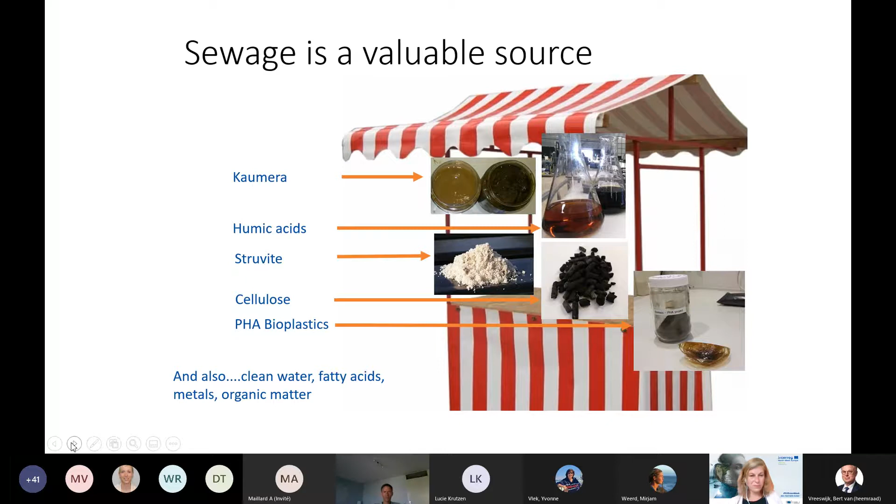The interesting question then is, why is less than 1% at this moment of these raw materials from sewage reused, or actually I must say upcycled? Our theory is that the potential of this big source of valuable materials is still unknown by the market. It's also a technical challenge to extract raw materials. It's quite complex to build installations. You will hear it soon from my colleagues and from our partners, to extract those raw materials in a way that it can be used by the markets.

Thirdly, sewage has an image of dirty and unsafe by the people who are not familiar with it. And of course that makes sense, because years and years ago we created sewage treatment plants to clean our water and to purify it as soon as possible. And what's left of it, the sludge, well it still has an image that it's not safe for any other purposes than to burn it. And last, the legal framework to commercialize raw materials is quite complex.

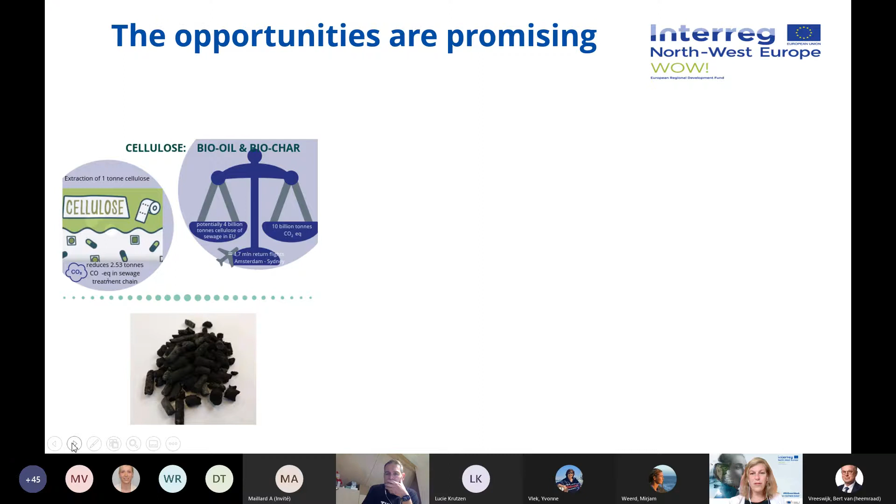The opportunities are very promising. If you look at the case of cellulose, you can make bio-oil and biochar from it—this is also the topic of this webinar. If you extract cellulose from sewage, it will reduce more than 2.53 tons of CO2 equivalents in the sewage treatment chain. This is equal to 4.7 million return flights from Amsterdam to Sydney, to make a comparison that sounds a bit more familiar.

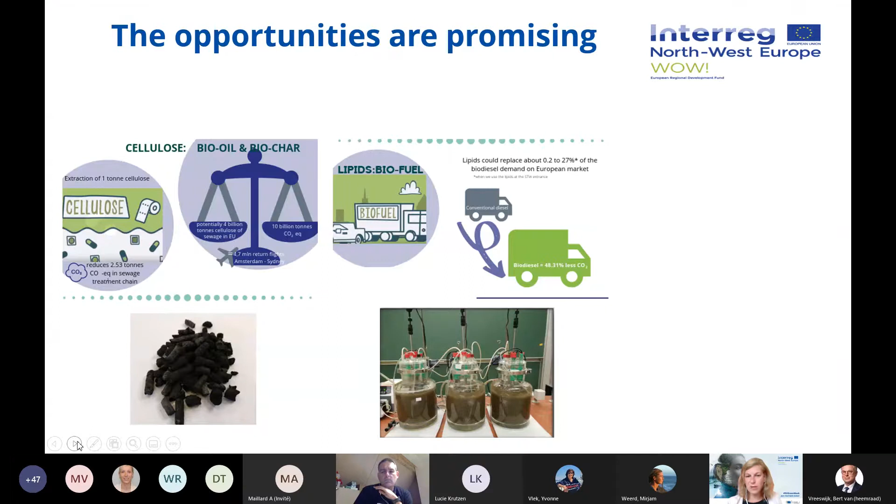If you look at lipids, you can make biofuel from it, and lipids can also be extracted from sewage. Lipids could replace around 0.2 to 27% of the biodiesel demand on European markets, depending on where in the sewage treatment plants you extract it. If you extract it from the beginning of the plants, 27% is the potential.

And last, PHA bioplastics have a potential production of 1.03 million tons of PHA per year from sewage treatment plants in Europe. That's substantial.

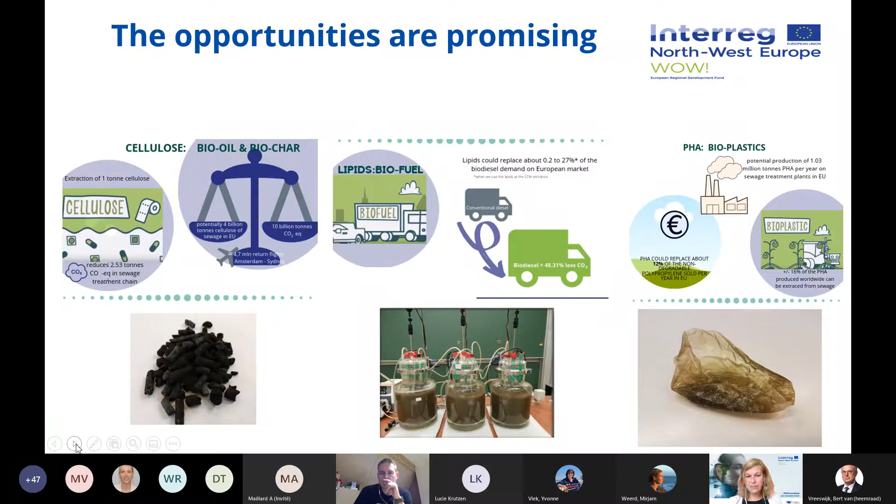So in the WOW project, our goal is to show that it's technically possible to recover raw materials from sewage. We would also like to create a European framework for the steps that need to be followed from waste to raw material—that's the end of waste process. And we would like to make market parties become acquainted with the potential for materials from sewage.

We hope that when the WOW project ends, we will have created 5 value chains for bioproducts from sewage, that we have 3 pilots—well, those are already there, we'll tell you more about that soon—that we have a supporting tool to help sewage treatment plant operators in their choices toward a circular approach, that's the decision support tool we've created, and finally that we create a European legal roadmap with one clear framework showing how you come from raw materials to valuable products.

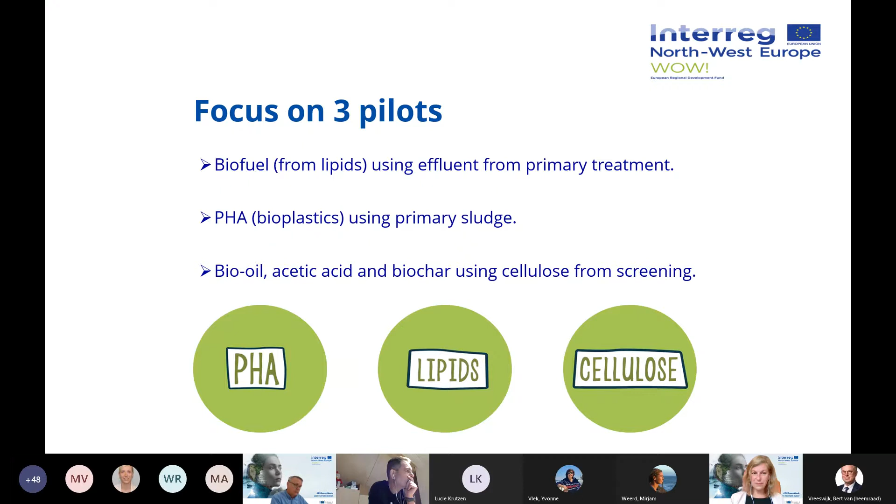In WOW, the whole project is built around 3 pilots. One pilot is about biofuel from lipids using the effluent from primary treatment. We have a pilot on extraction of PHA bioplastic using primary sludge. And we have the cellulose pilot, in which we extract bio-oil, acetic acid, and biochar using cellulose from screening. So far, we have those 3 pilots more or less running.

We created an overview of the current value chain and the market potential in Northwest Europe, and we made 5 legal action plans for 5 Northwest European countries, showing the challenges in the current situation to create a valuable source from raw materials from sewage.

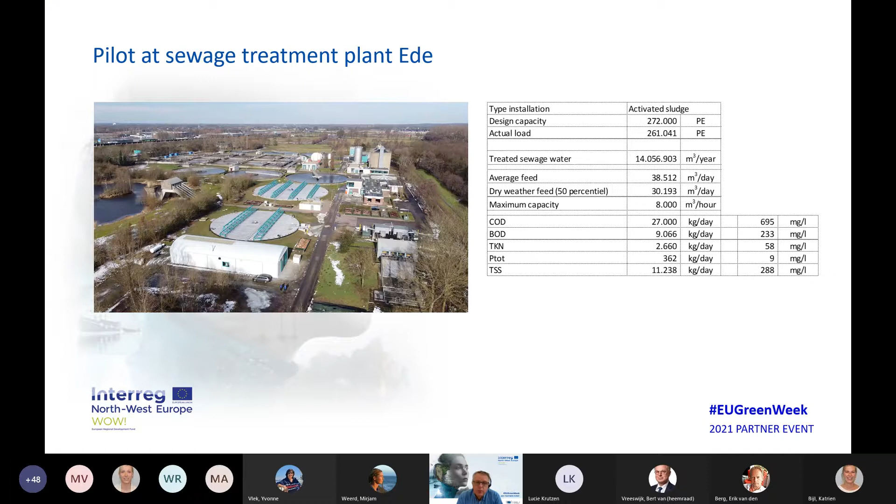Capacity of the treatment plant under normal dry weather conditions is 30,000 cubic meters a day, and the average feed is about 38,000 cubic meters per day. We don't treat the full flow of the installation.

We made a mass balance over the fine screens at their maximum capacity. So it doesn't mean the pilot will always run at this, but the capacity of the installation is based on an average flow of about 800 cubic meters per hour, having total suspended solids of 232 milligrams per liter. This is different from the average number you typically find, but prior to doing the design, we took samples of the influent to determine an average, and came up with this number. So that's the basics.

The efficiency we aim for—and there's always a discussion about the efficiency of rotating belt fine screens—we measured it on black ribbon paper filter, and we expect to have an efficiency on dry solids of about 54%. Taking into consideration that the discharge of screened material has 6% dry solids, we will get about 1,800 kilograms of dry solids a day at maximum capacity.

Of course, the solids that don't leave the installation with the screened material go to the filtrate, and that's a little bit less than 50% of the solids going through.

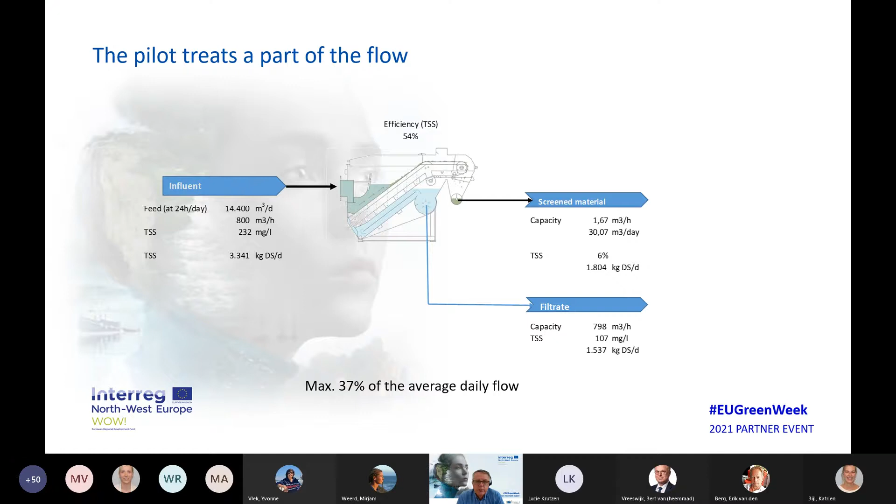On average, we will run somewhat between 400 and 600 cubic meters per hour. The installation is set up with two rotating belt fine screens, with a feed pump installed after the coarse screens, which is 6 millimeter coarse screening, and then there is a flow measurement to measure the capacity split over two rotating belt fine screens that operate in a master-slave setup.

So basically one machine is up and running, and when we get more solids than it can handle, the second one comes up as well, and they alternate operation. The installation runs based on the level in the machines. We set a certain level, and based on this level, the belt speed is controlled. When we have maximum level and maximum belt speed for some time, the second machine will switch on.

During this test, we will also test something new that is not installed on any rotating belt fine screen yet. So there's a novelty in the machine, and that novelty is that we have installed a scraper installation.

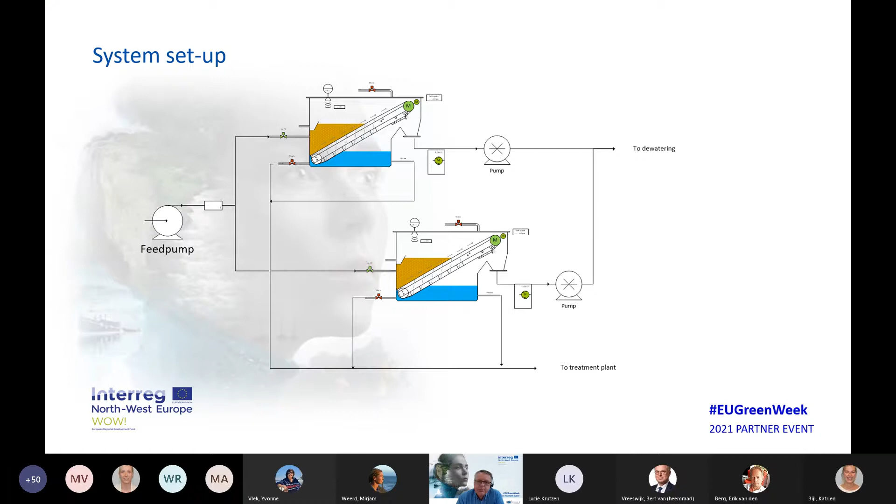A setup for the building has been made, you see some pictures of it. Basically, the building is set up in two parts: a wet part and a dry part. On the right side is the wet part, where the two rotating belt fine screens are installed, and water comes from there to the dewatering machine that is part of the Pulse Heat installation.

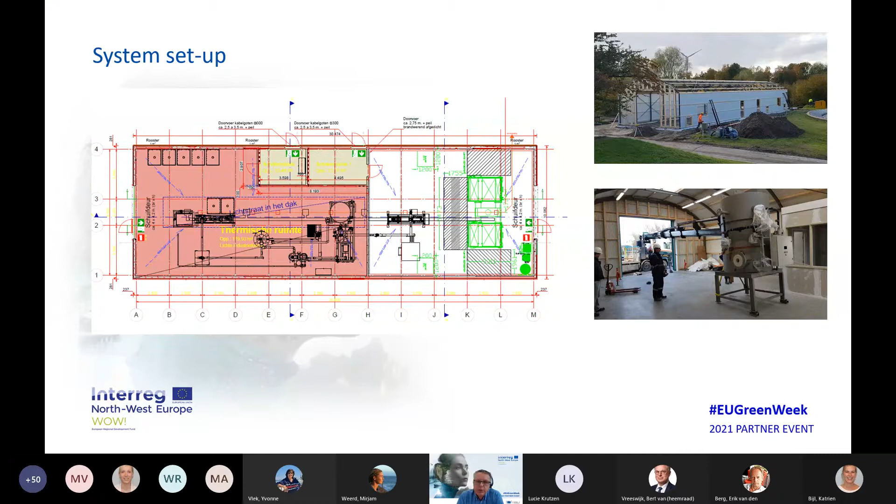A quick tour. We don't have the online tour, but some pictures so you can recognize it. Here we have the feed pump pumping water after the coarse screen, going into the pressurized side, coming up through this pipe, where we measure the flow before the split.

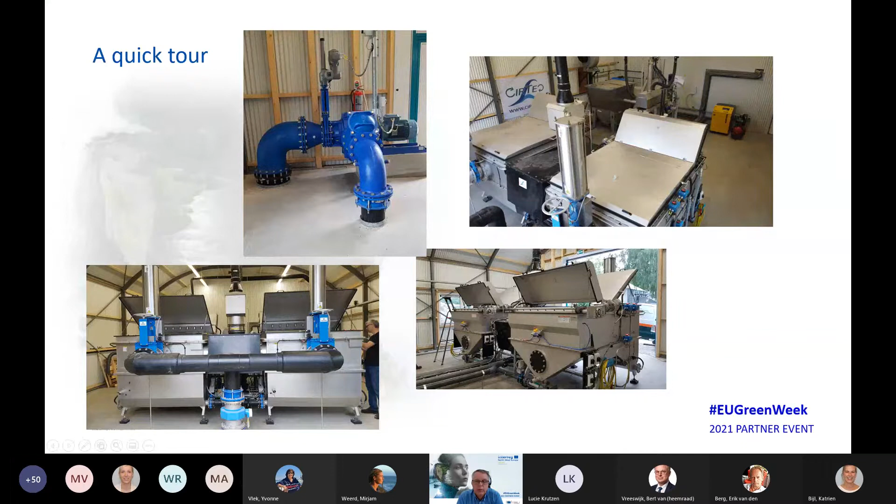It goes over the two rotating belt fine screens. In the middle of these machines there's a collector where we collect the filtrate, the overflow, and the bottom flush for discharge. This is the exit side of the machines, where the pumps go into the dewatering installation, which is controlled fully automatically based on settings, so we can monitor it from a distance and see what is happening.

We measure basically all the controls and all the frequencies of the equipment, meaning we can make a pretty good mass balance and see the operations.

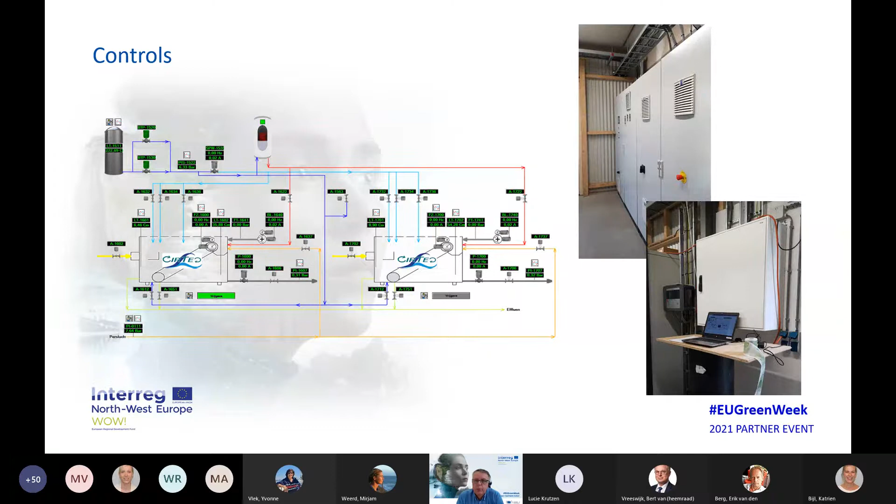Talking about operation, this is how it looks when the machine has feed water, and then the material on the discharge side as well.

So this is, in short, my presentation, and I would like to give the floor to Mark. Sorry for the disturbance sometimes, but we have some issues here around us, so sorry for that.

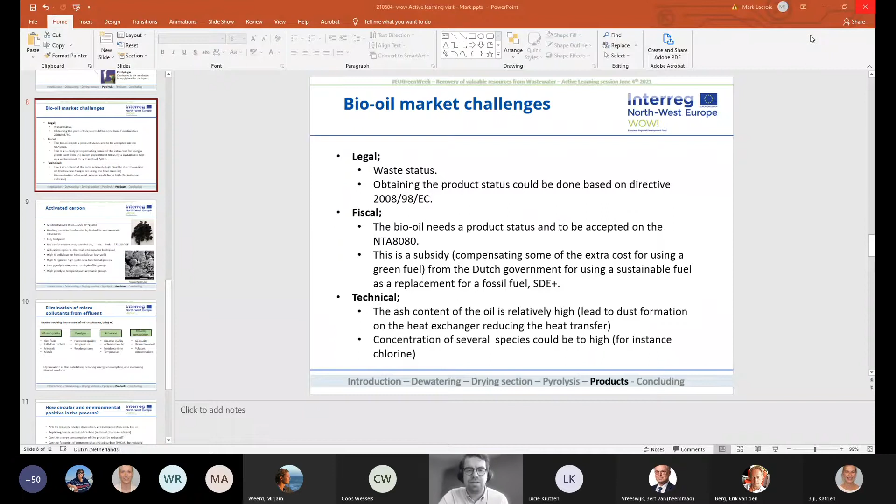I'll also be giving an update in this presentation about the process equipment supplied by Pulse Heat, and I'll discuss the pyrolysis products, and give some regard to the issues and market opportunities of these products.

In my next slide, yes, here it is. To make the explanation of the rest of my presentation a bit easier, I'll give a short introduction of the process.

As Coos already discussed, the sewage is partially pumped to the cellulose screens, which are part of the wet part of the installation. There the cellulose is recovered, and then it is dewatered. The dewatering will be shown in the next slide, and after the material is dewatered, it will be dried and made into pellets suitable for use in the pyrolysis section. The pyrolysis section will yield bio-based products that are very interesting for this project.

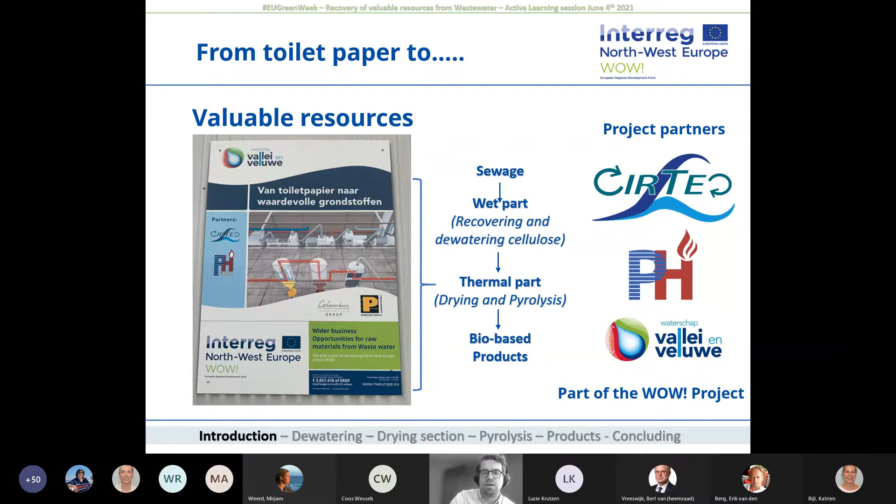This buffer is used to physically separate both parts of the installation, so if a process complication happens in the wet part, the thermal part doesn't directly have to get into trouble because of that. The filtrate coming from this press is returned to the wastewater treatment plant.

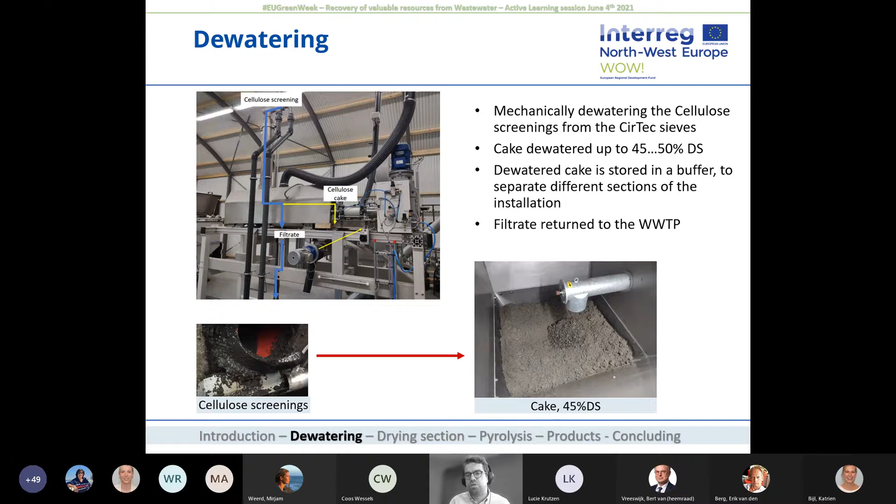The thermal energy necessary for these dryers comes from the pyrolysis pyrogas co-combustor. In that combustor we basically have two separate burners: one using propane as a source, which is our main burner.

When the pyrolysis section, which I'll discuss later, is started, it produces a flue gas, a syngas, which is also combusted in that co-combustor. That's also why it's quite large, because due to environmental regulations you need a certain temperature there of at least 850 degrees, and also a certain residence time of 2 seconds.

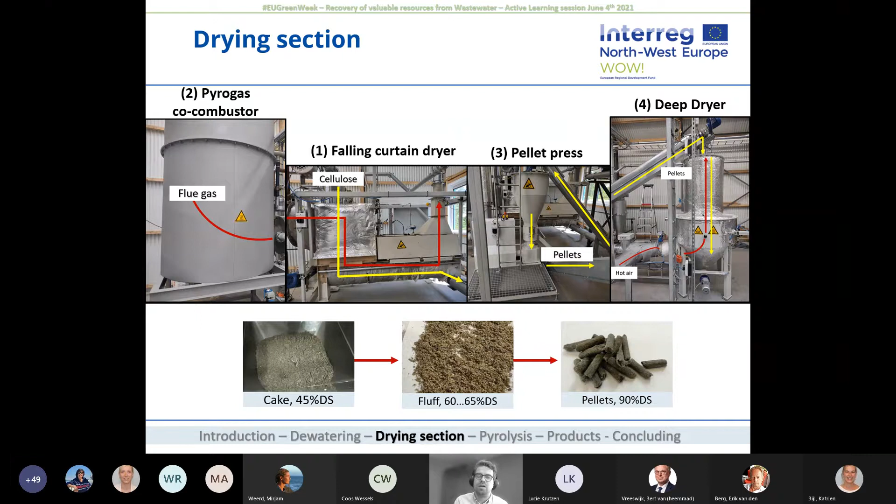Both gas streams, from the deep dryer and the falling curtain dryer, go through a wet cyclone before being emitted into the air.

But what is pyrolysis? Basically, if you have an organic material and heat it in an atmosphere with low oxygen content, the material will start to degrade and a volatile fraction will emit from it.

This volatile fraction can be condensed in a few stages. One leads to a bio oil, another leads to the acid, and another leads to the syngas I discussed.

The reactor we're using is a flash pyrolysis reactor, with a short residence time for the gas phase. Whether you call it an advantage or disadvantage, it yields a higher bio oil yield compared to the bottom product, which is biochar.

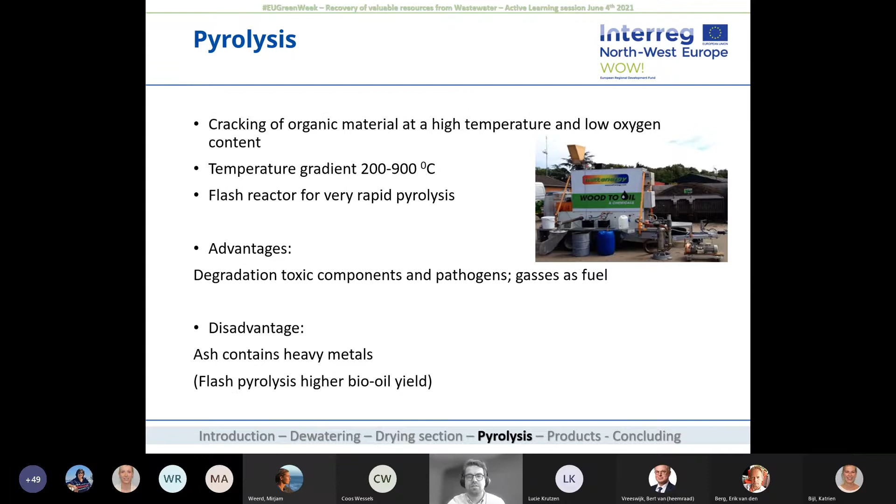Dr. King asked which machine is used for dewatering. It's our own design, a screw press. You compress the cellulose, and by compressing it, there's less room for the water between the fibers, and the water is transported through a sieve.

Another question: is this pyro machine also usable for other materials than the pellets? Yeah, you could also use it for other organic material. We've tested it with wood chips, and we could also use it with corn chips or something else.

This is an image of the pyrolysis section. It consists of four separate units. So you have the reactor.

The pellets are transported there from our pellet buffer, and we want to make sure there's a stable bed in the reactor so all the pellets get approximately the same residence time, which is important to keep product quality stable. We're using a flue gas burner, a propane burner, generating flue gas of around 900 degrees, as a thermal heat source for our reactor, because the pyrolysis reaction requires energy.

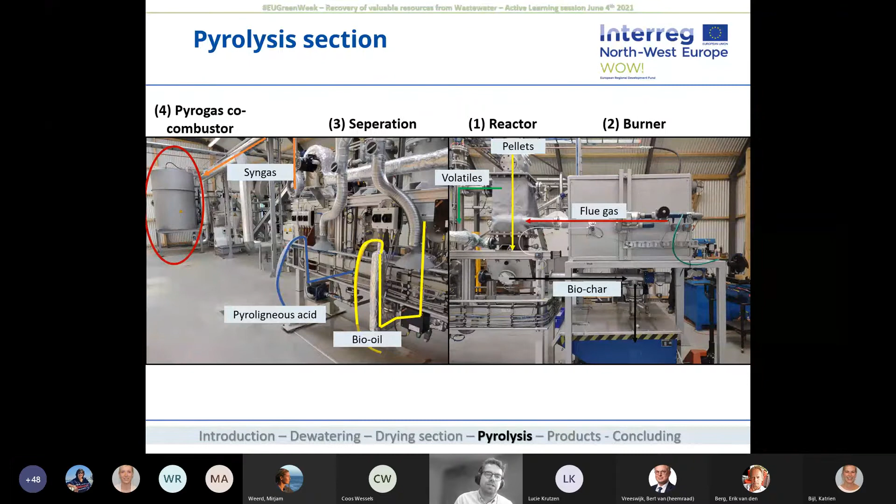Okay, here are the images of our pellets and the different components we are creating from them.

So we have this char that leaves the reactor at the bottom, and after activation, it can be used for absorption of micropollutants, for instance, from effluent.

We have a bio oil. This is a viscous oil with a high energy density, and ideally it could be transported out of the location site and used on a different location for combustion, and then to generate steam there. By generating steam over there, you're able to reduce, for instance, natural gas consumption.

Then we have a pyroligneous acid. Ideally, it would be used on the wastewater treatment plant, since it could enhance the denitrification, and it's useful for the biological phosphorus removal.

And then this is also the pyrolysis gas or the syngas, as I described it before. You can also see it gives a really nice flame, so this is also suitable for supplying heat for our dryers.

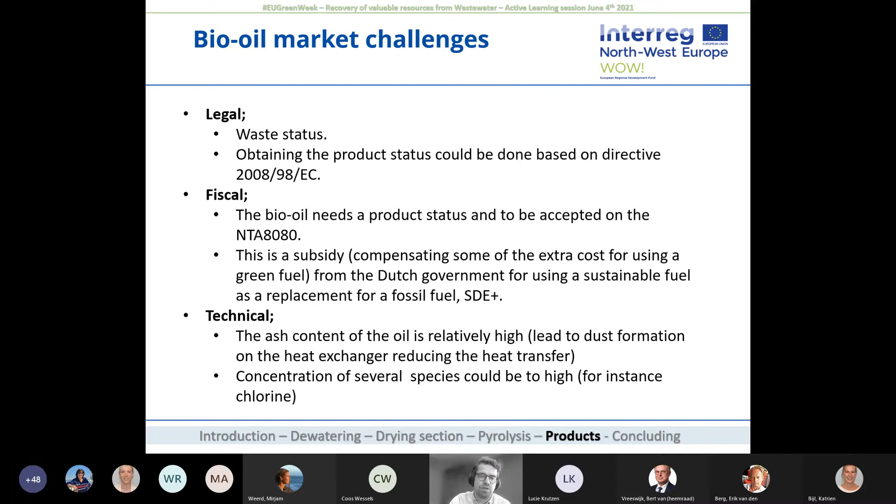The carbon, so the biochar that we're producing at the reactor, you can activate it using several methods. For instance, thermal - then you'll be using steam or carbon dioxide as a means to activate it. With activation, you're basically increasing the microstructure of the carbon, so you're increasing the surface area, and this surface area is used as a binding site for different micropollutants.

Based on the size of your pores and the total surface area, you can bind different chemicals. And then there's also chemical means of activation - with this chemical means, you usually get a bit higher surface area than the thermal one.

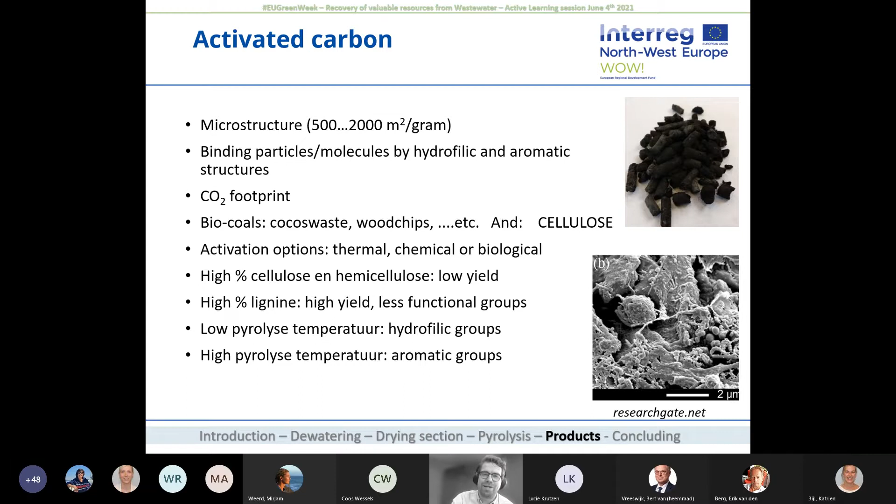You can also use different feedstocks, and then there's also the composition of your feedstock. So, for instance, with cellulose, you have high cellulose and hemicellulose content, which also yield different components of different fractions in your biochar. This would lead to, for instance, a bit higher bio oil yield and a bit lower char yield. And the pyrolysis temperature also affects what kind of groups you get, and more of that. But this does make it a bit complicated - and this is also what I'm going to show you in my next slide.

So if you want to remove micropollutants from effluent, there are several variables that can affect the absorption or the total removal. You have this influent quality, for instance, the amount of cellulose that's in the material, or the amount of minerals, and also whether you have a first flush. It will also affect your feedstock for the next section. And in the pyrolysis section, you can have different temperature and different residence time, which lead to a different surface area. After that, you can get different variables for your activation.

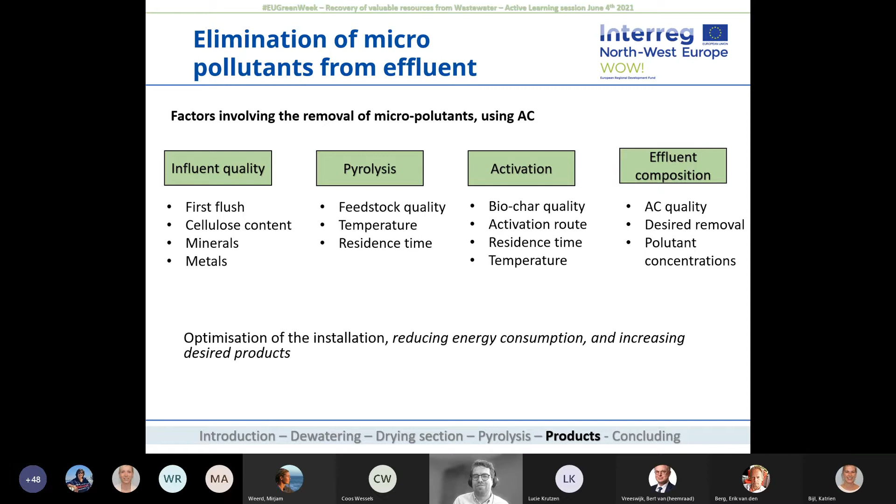And then there's also the effluent you want to treat. The effluent has different pollution concentrations, and you have a desired removal that you want to keep. So basically, there's a lot of optimization to be done.

And then also an obvious interesting question - how circular and environmentally positive is this whole thing?

From a production perspective, a wastewater treatment plant is very interesting because you have a continuous source of feedstock for your process. And by using this feedstock, you're also reducing the amount of pollution in the wastewater treatment plant. So you're basically reducing your sludge deposition and making useful products out of it. It's also nice to use your own products on your own wastewater treatment plant.

So you could use your fossil-based active carbon and replace it with your own biochar. And this process can most probably also be made more energy friendly by using different or less energy for drying. This drying is usually one of the largest energy consumers.

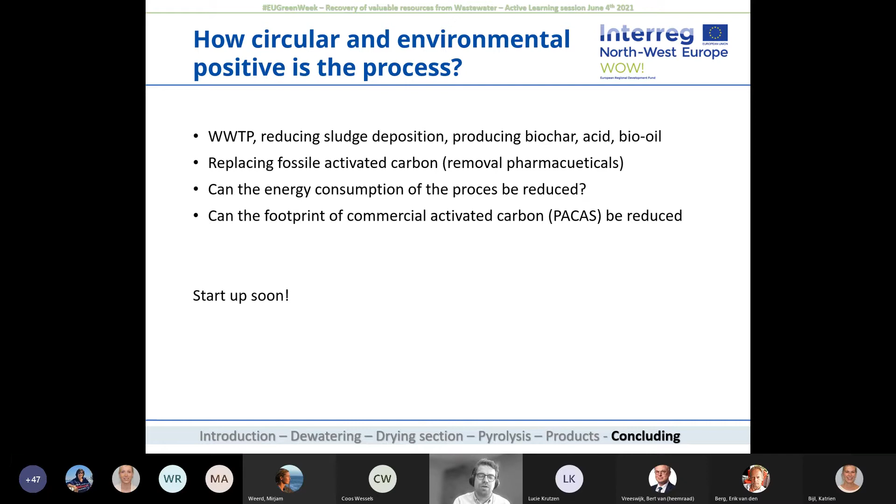What would also be very interesting is how the footprint of our carbon compares to commercial activated carbon. We're about to make our own bio-based products very soon, hopefully in the next few weeks. So it's going to be very interesting.

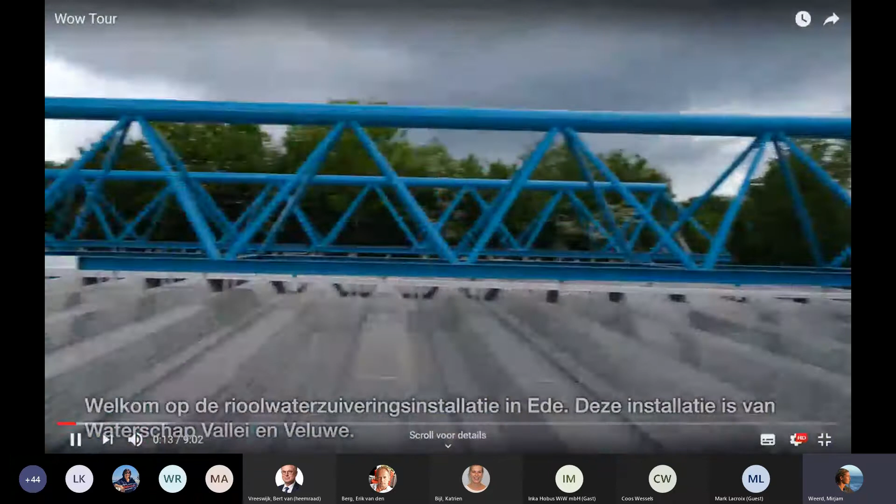Welcome to the sewage treatment plant of the community of Ede. This plant is part of the Dutch Water Authority Waterschap Vallei en Veluwe. On this plant, we run innovative pilots from the WOW project together with the partners. Let me introduce our partners, Marit and Mark. Mark is from Pulse Heat, Marit is from Cirtec.

I wanted to show you another part, very important for our pilot, because I take you in this direction. Here we have the coarse screen, and this is important for our pilot. All the wastewater that comes into the sewage plant is first sieved to remove all the bigger parts. So they are removed, then the water goes through the whole plant. So I go inside, see you later? Yeah, see you later.

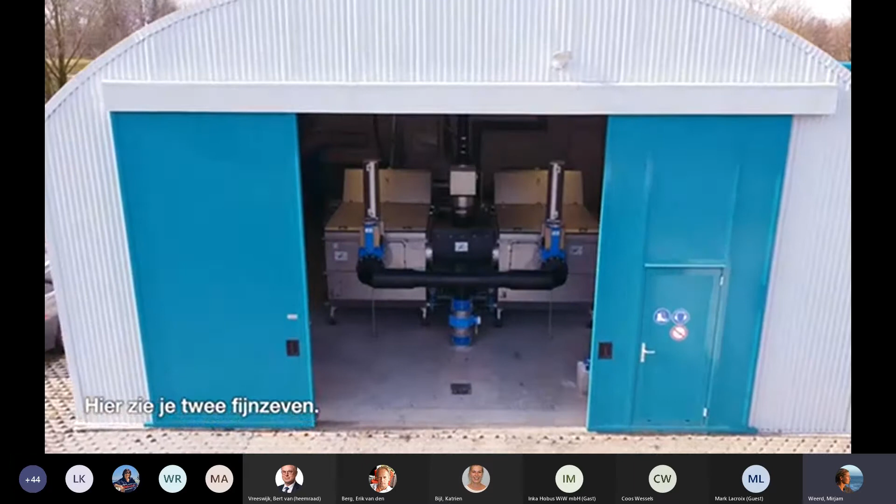So now we are in the pilot itself. Here you have the first step, that's the pumping step. A part of the incoming sewage is pumped into the fine sieve installation and the rest goes to the whole treatment plant. This is a fine sieve. We have placed 2 machines. Each machine is good for 300 cubes per hour to deal with. This machine is very simple in its operation.

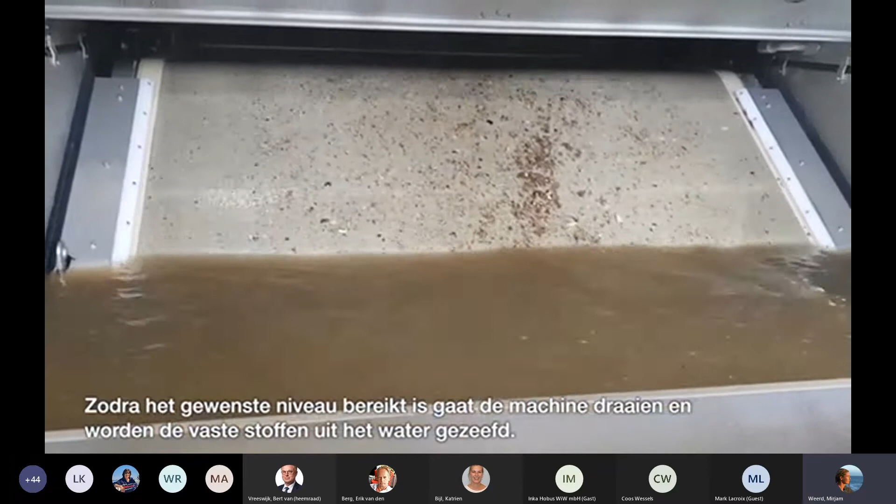We are waiting for the water to come up into the machine. There is a level control in it, and as soon as the level is high enough, the machine starts to rotate to remove the dry solids out of the water. There is a clever PID system that regulates the speed of the belt, so depending on the amount of water or how many dry solids are in it, the machine rotates faster.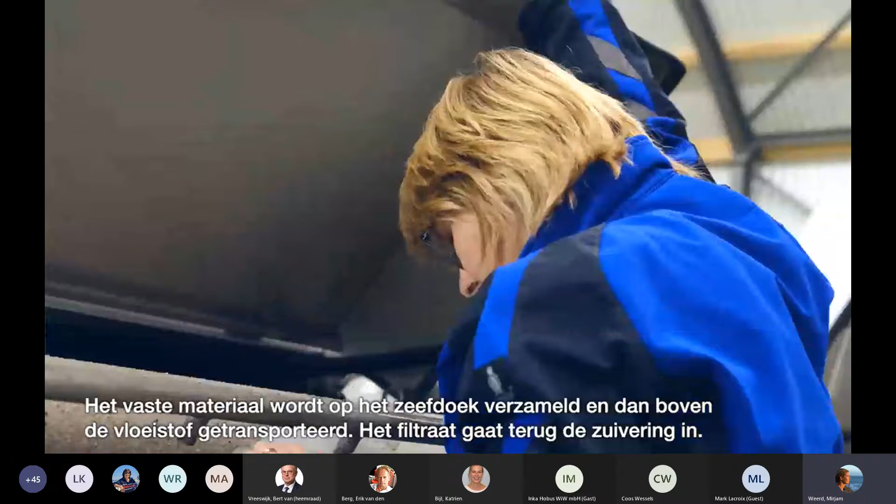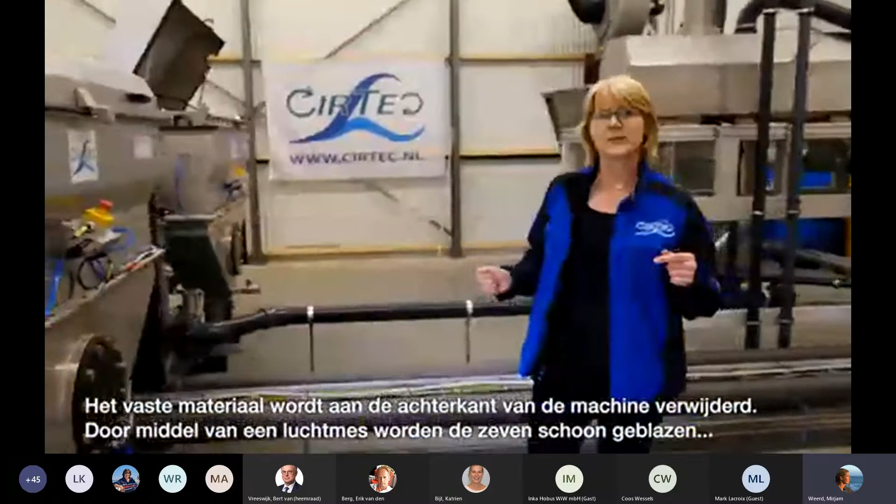As soon as we have collected the materials on the filter mesh, the filter mesh comes out of the water, the filtrate goes back to the sewage treatment plant, and the dry solids are removed at the back side of the machine. With an air knife, we blow the screenings off the filter mesh, they fall down in a trough, and under the trough we have a pump, and with that pump we simply transport the material to the dewatering machine.

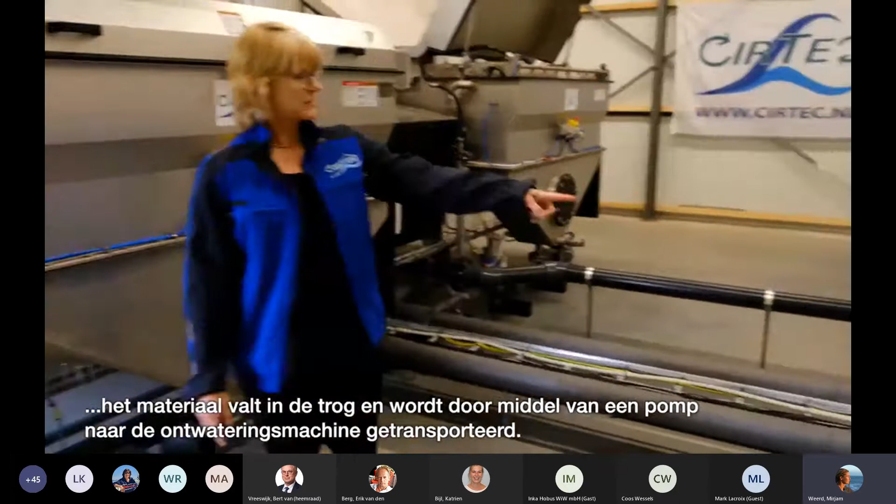Nice that you're here. Hello. Maybe you can explain a little bit of the rest of our pilot installation.

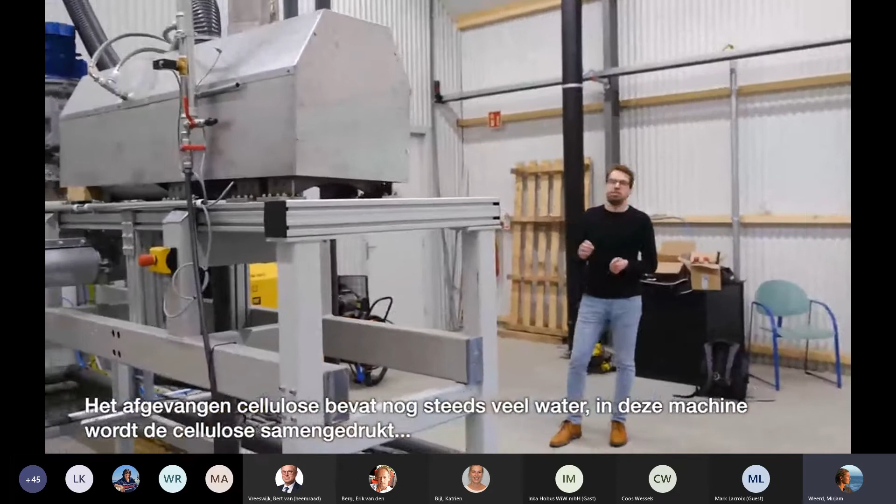Yeah, sure. This is the dewatering machine. The recovered cellulose still contains a lot of water, and using this machine, the cellulose is compressed. By compressing it, you're able to remove the bulk of the water. The separated water goes back to the wastewater treatment plant, and the compressed cake is sent to the buffer over there. The cake is dewatered up to 45 to 50% dry matter.

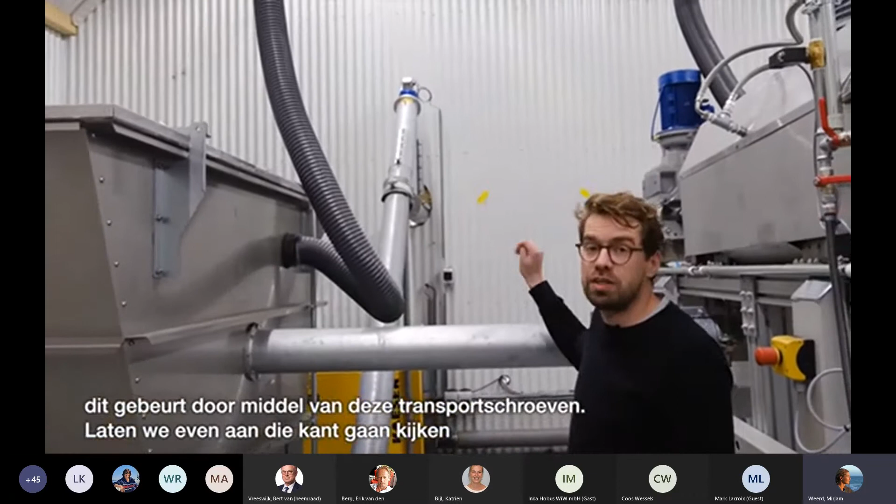Let's take a look in the buffer. With the cellulose buffer, we're able to dose the amount of dewatered cellulose onto the drying section. Using these 2 screws, the cellulose is transported to the dryer section. Let's take a look over there.

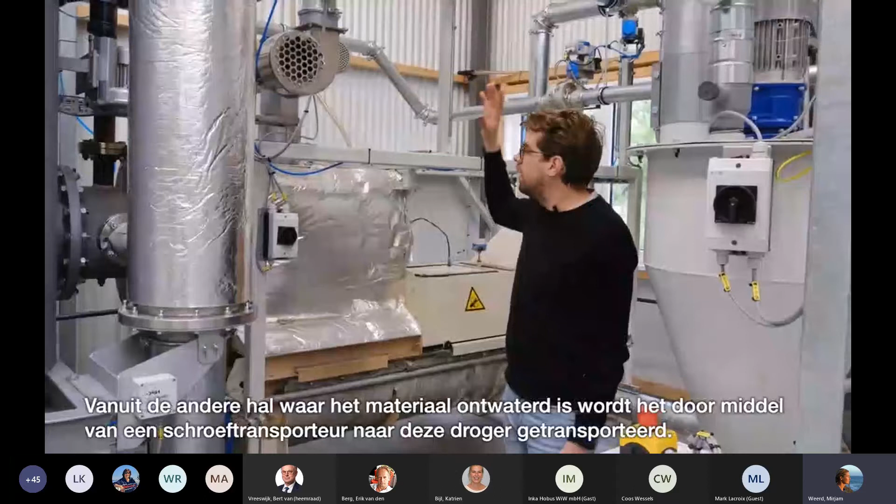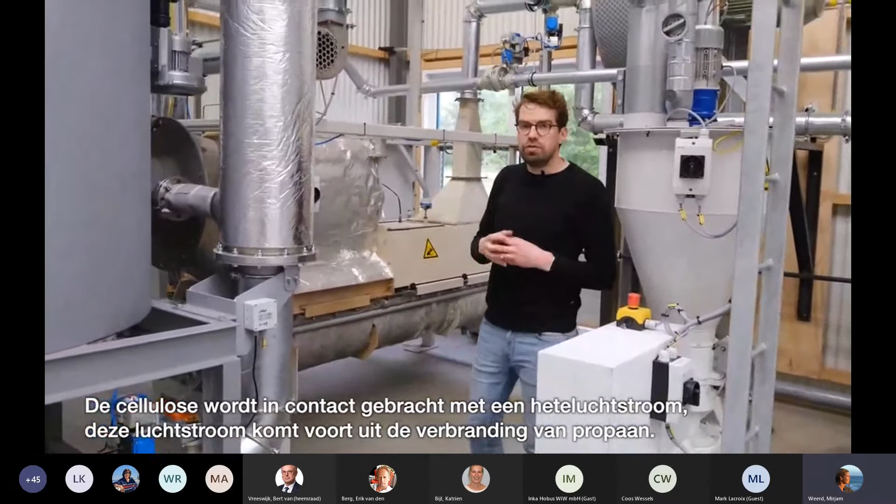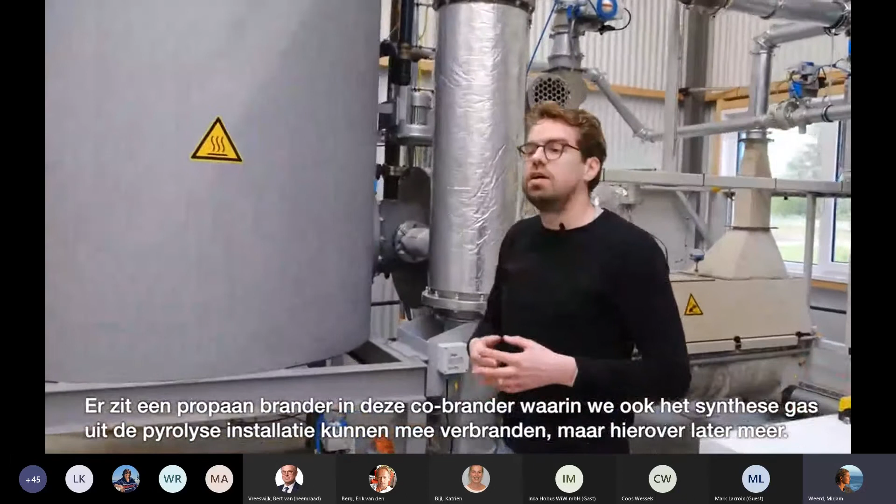From the other hall, where the material is dewatered, there's a screw conveyor that transports the cellulose to this dryer. In this dryer, the cellulose is brought into contact with a hot airstream. This airstream is generated by the combustion of propane. There's a propane burner in this co-combustor. In this co-combustor there's also something I'll tell you later - there's also a burner for the synthesis gas coming from the pyrolysis plant.

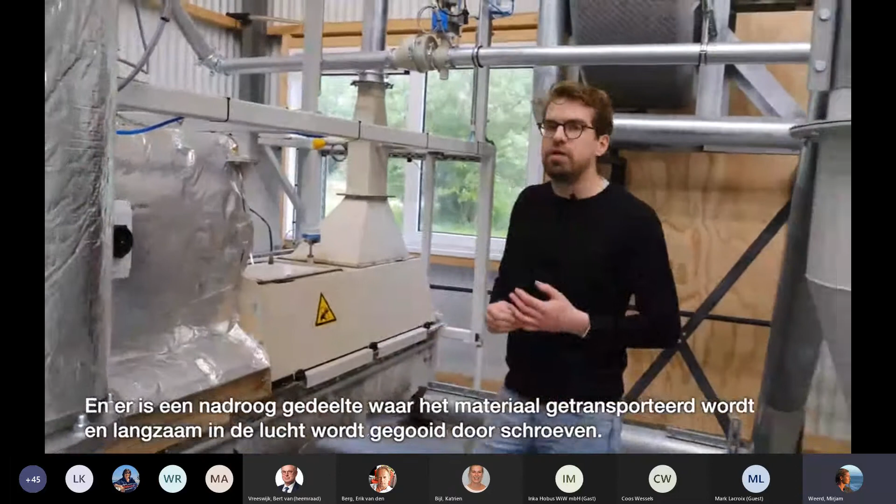In this dryer you have basically 2 sections. There's the flash section, where the high temperature flue gas meets the cellulose, and there's an after-drying section. The material is transported slowly and thrown in the air by several screws. The dried material is then transported using 2 screws to this pellet press.

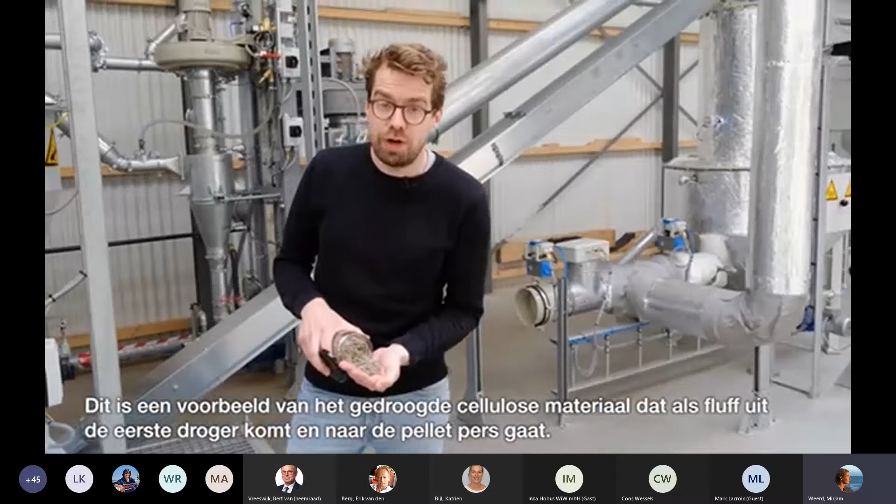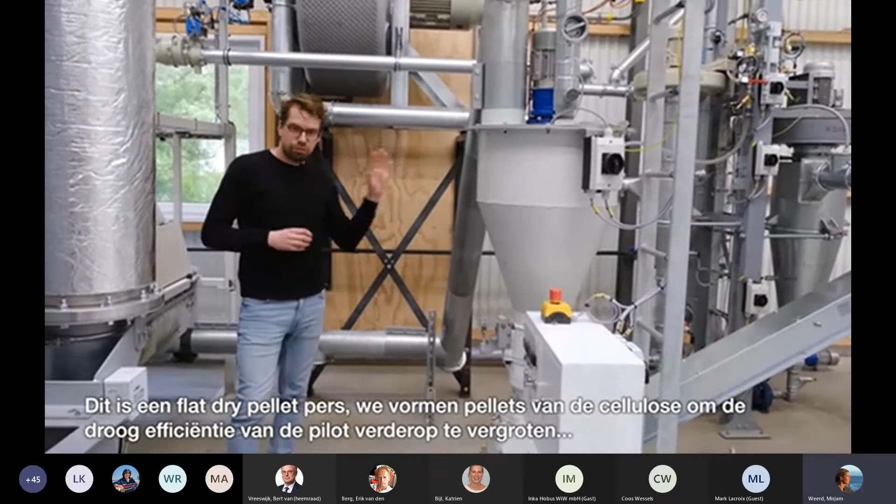This is a sample of the fluff. This is the dried cellulose coming from the first dryer, and it is fed to the pellet press. This is a flat die pellet press, and we create pellets from the cellulose to increase the drying efficiency further in the plant and to get some better material handling for the pyrolysis.

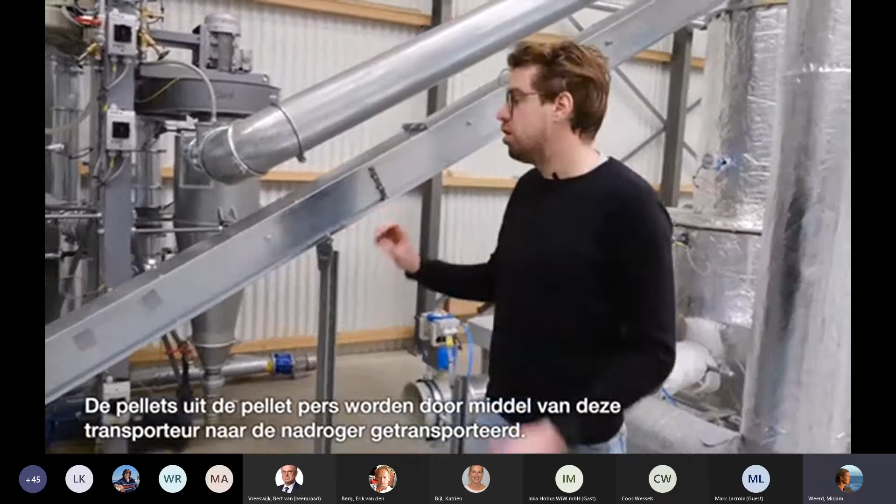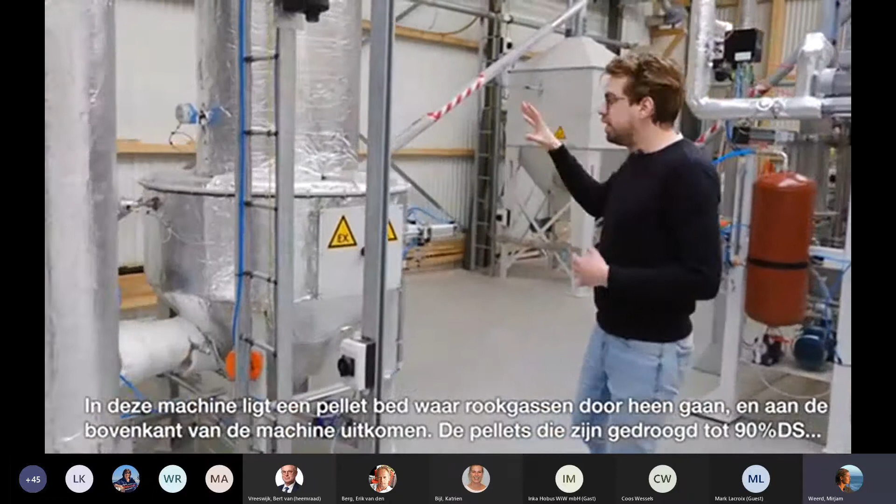These are the pellets coming from the pellet press. The pellets produced in our pellet press are transported using this conveyor to our deep dryer. In the deep dryer, the pellets are dried using part of the flue gas stream coming from the co-burner. So in this machine, we have a pellet bed, and the flue gas stream goes through the pellet bed and leaves at the top of the machine.

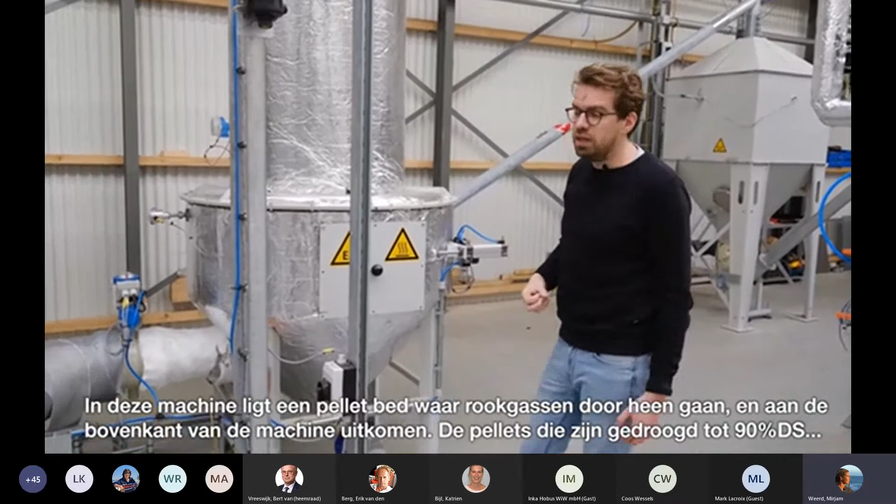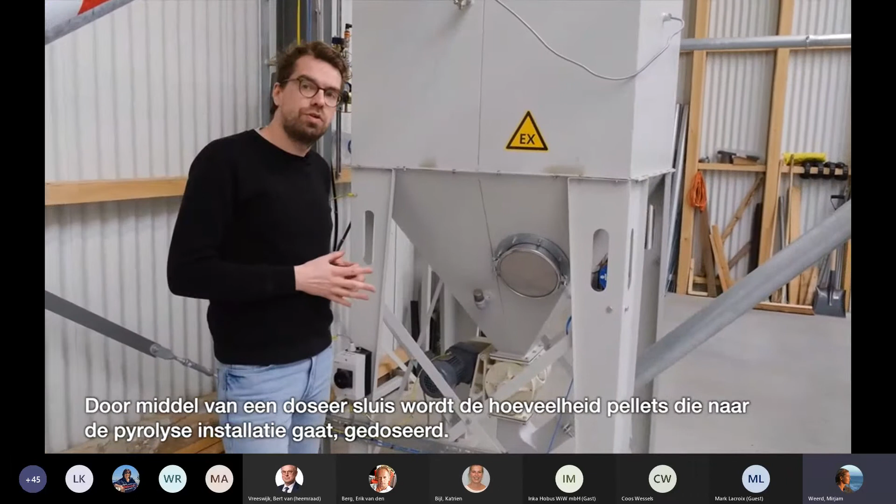The pellets, dried to a dry matter content of approximately 90%, leave the machine at the bottom, and they are transported using two screws to our pellet buffer. Here in the pellet buffer, the pellets are stored before they are transported to the pyrolysis plant. There's a rotary valve at the bottom of the pellet buffer, and the rotary valve limits the amount of pellets transported to the pyrolysis device.

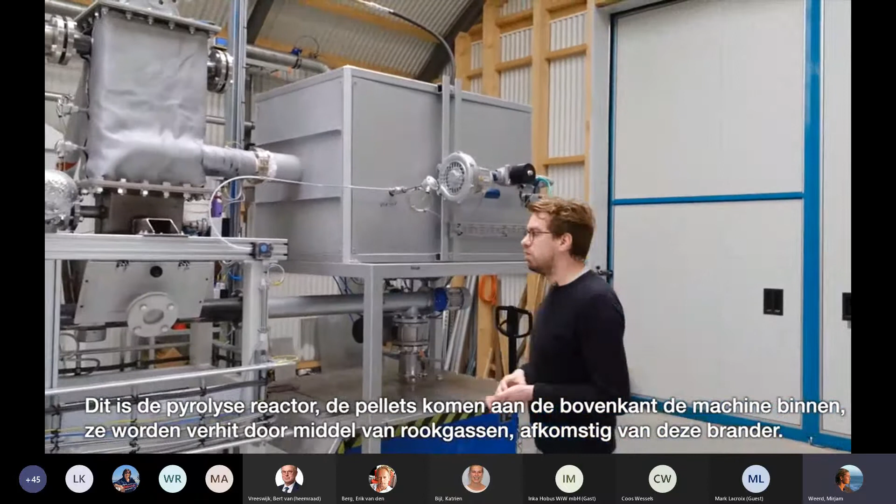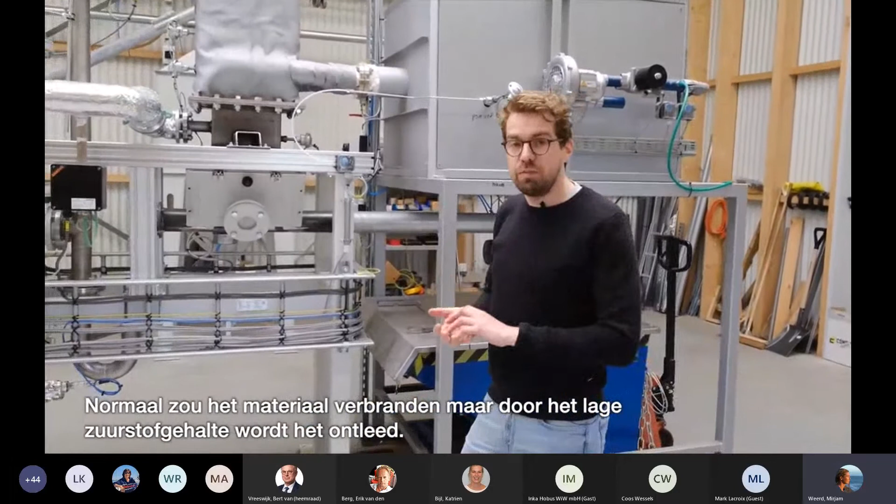This is the pyrolysis reactor. The pellets enter the reactor at the top, and in the reactor the pellets are heated using a flue gas stream coming from this burner. When the organic material in the reactor is heated in an environment with a low oxygen content, the material will decompose. Usually it would combust, but since this is pyrolysis, the material decomposes into a volatile fraction, and the volatile fraction leaves the reactor at the top.

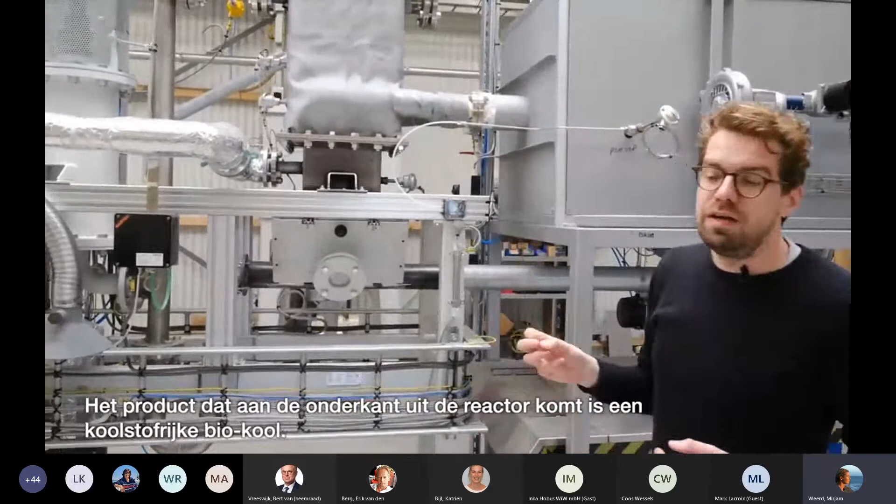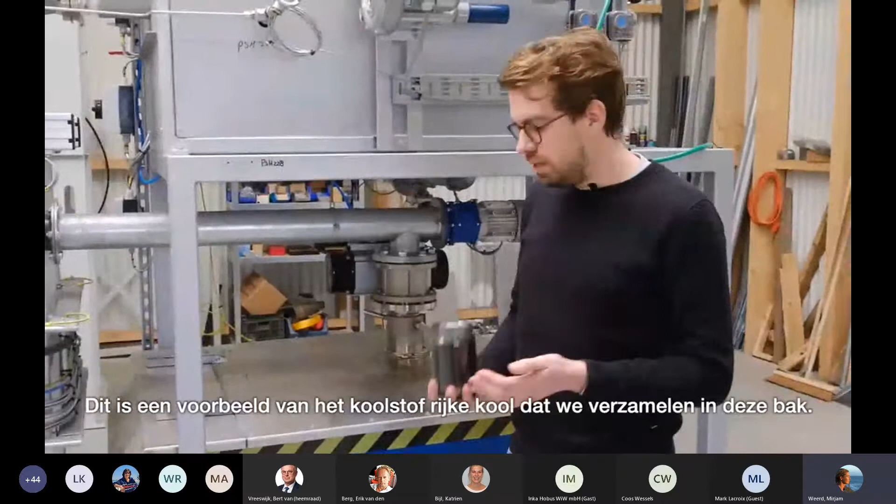The bottom product of the reactor is a carbon-rich char, and it is removed from the reactor using this screw and stored in this bin. This is a sample of the material we've collected in this bin. It is a biochar, and once activated, it can be utilized at the wastewater treatment plant. There, it can be used to reduce the amount of micropollutants. It can capture them by adsorbing, thereby reducing the accumulation in the surface water and thus increasing the water quality.

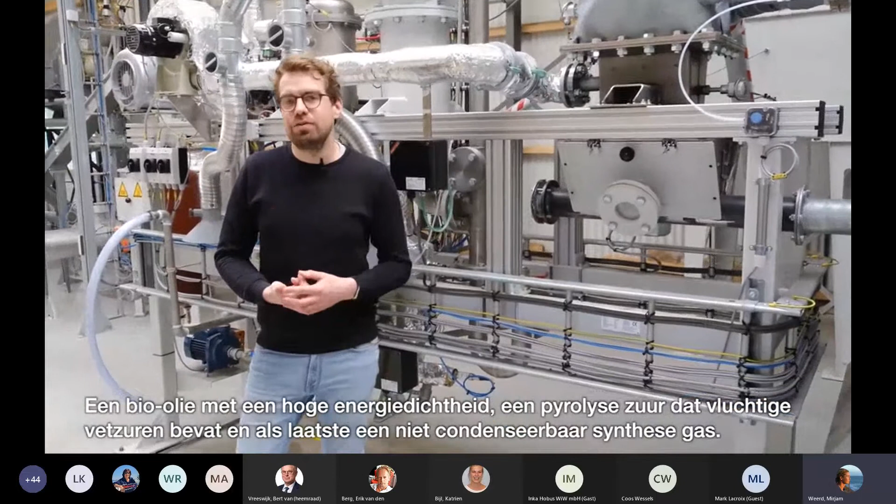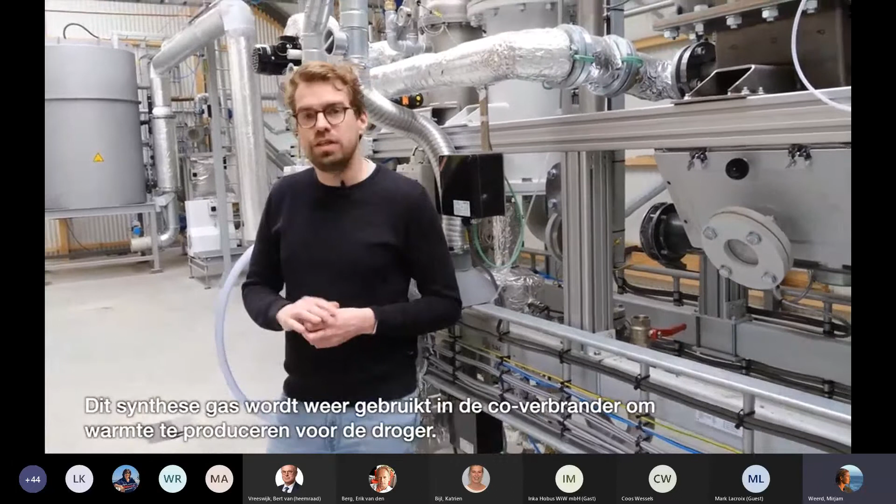The volatile components coming from the reactor are separated into three phases. There's a high energy dense bio oil, a pyroligneous acid containing several organic acid fractions, and a non-condensable syngas stream. The non-condensable syngas stream is combusted in our co-burner to generate the heat necessary for the drying.

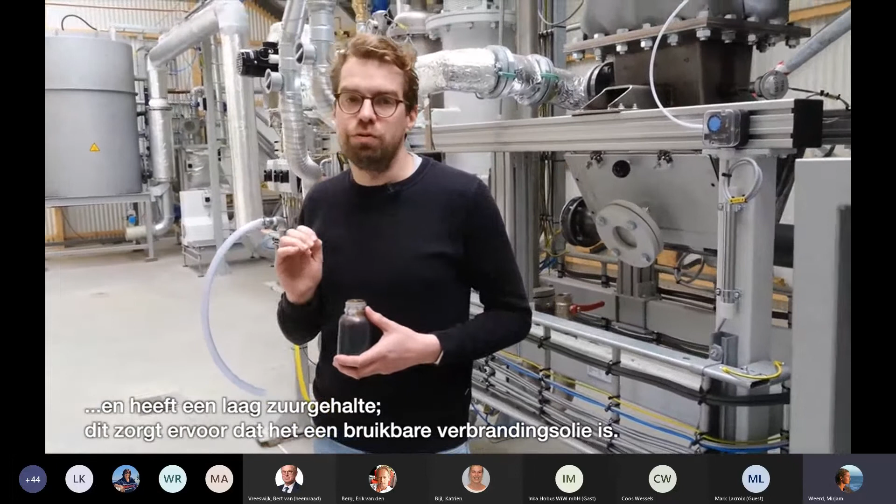This is a sample of bio oil. The bio oil from this installation has a low water content and a low acid content. This makes it a useful fuel oil. So the bio oil from this installation can be transported to a different location and combusted there. The heat from the combustion can be used to generate steam at that location.

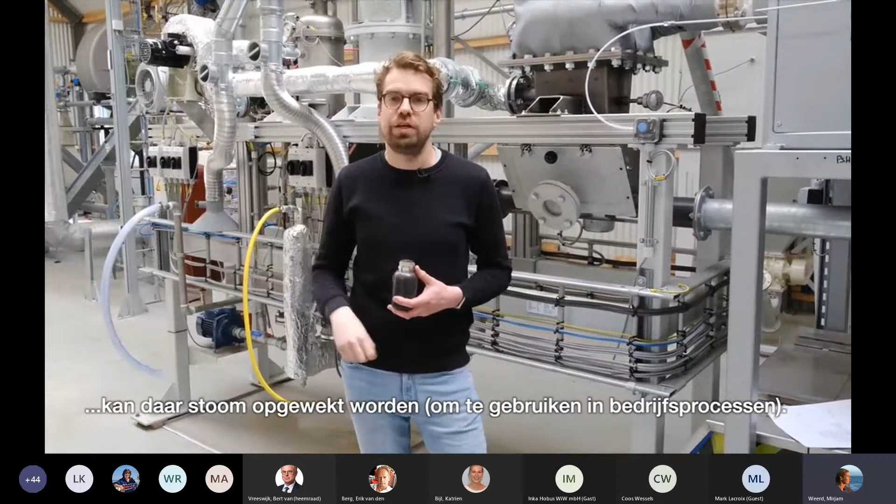This is a sample of the pyroligneous acid from the installation. It is, obviously, a mixture of water with some more volatile components coming from the cellulose. It can be used for the BioP process at the wastewater treatment plant, or for denitrification.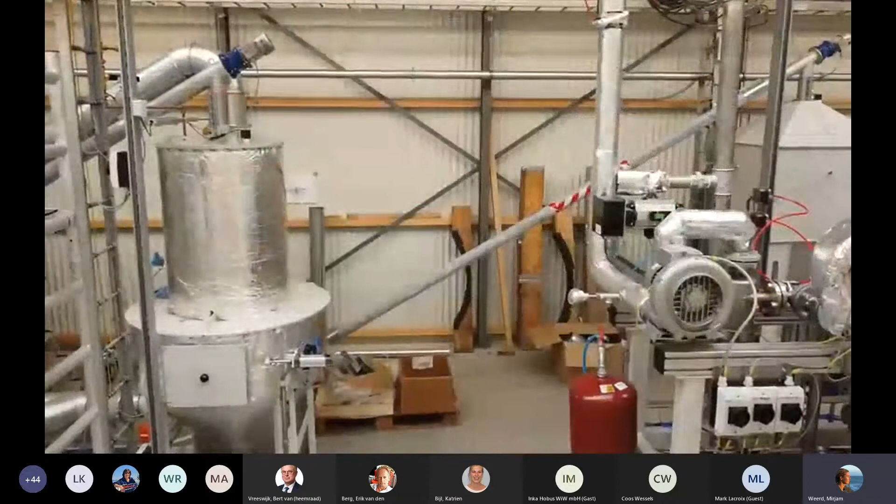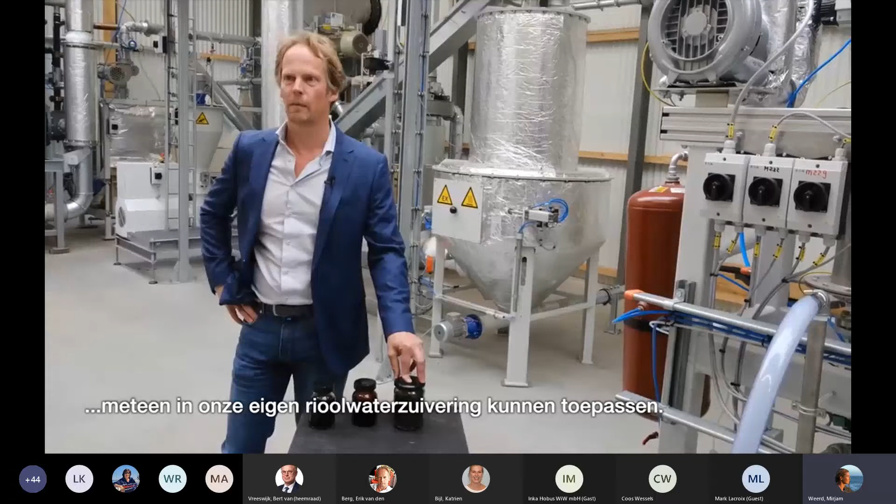What we are especially enthusiastic about in this pilot is that we use the bio-based produced products in our own process, within our own treatment plant. It was a great collaboration between Water Authority Vallei en Veluwe, Pulseed and CirTec. Of course, we are very proud of this innovation, this innovative pilot. There is a significant future for bio-based products like bio oil or biochar. Are you part of this future?

I hope this video showed a little bit more about the process behind the pyrolysis and getting the cellulose out of the sewage.

Before we continue with the explanation of the decision support tool, I would like to ask a question to my colleague Erik. So Erik, the pilot was just approved to start running, but I was curious, what do you think about the process so far?

Yeah, Katrien, I'm very proud of this process and this project. We have realized a pilot plant which provides really good opportunities for research into the valorization of resources derived from wastewater.

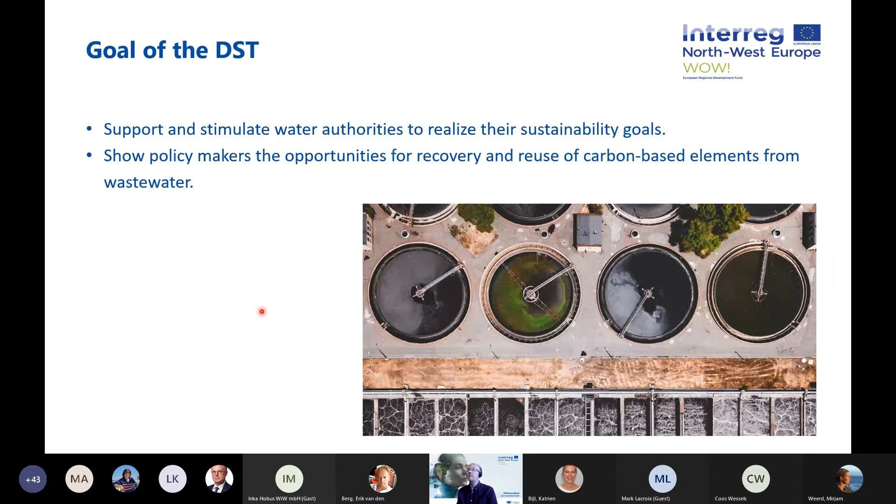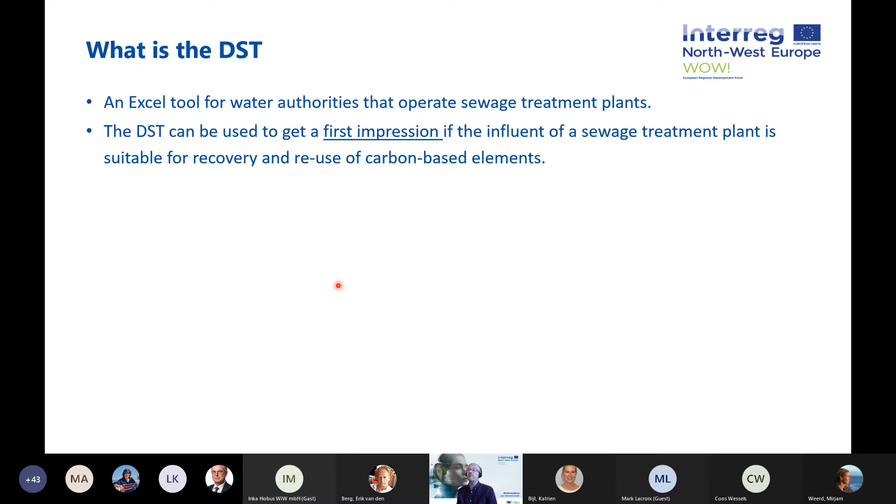So what is the DST? Well, the DST is an Excel tool which can be used by water authorities that operate sewage treatment plants. This DST can be used to get a first impression if the influent of a certain sewage treatment plant is suitable for recovery and reuse of carbon-based elements. There we focus on the products that we developed, or the pilots that we developed within the WOW project. So we look into the cellulose recovery that was already discussed this morning.

The other pilot we look into is the production of bioplastics, microbial bioplastics accumulation, so PHA. And the third product we look into is the production of biofuel from microbial lipids, as Katrien already briefly explained in the beginning of this webinar.

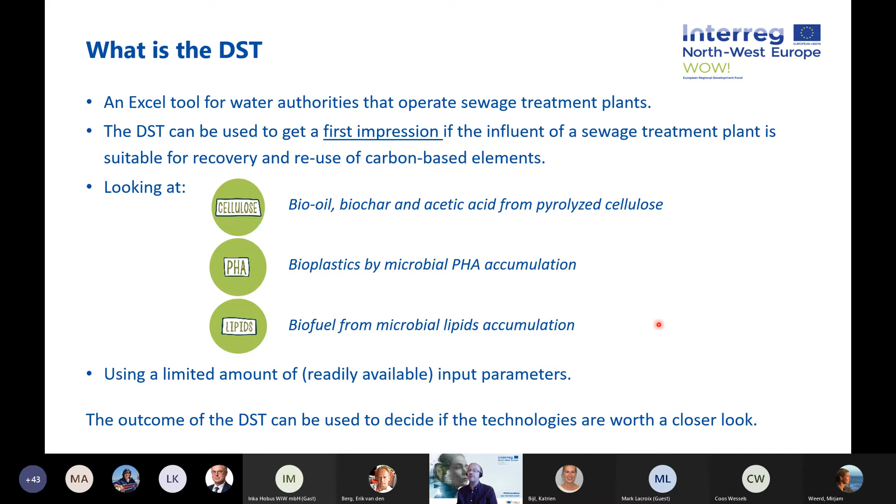The idea behind the DST was that we would like to use a limited amount of readily available input parameters, so it's easy to use the decision support tool without having to look up too much information about the influent of sewage treatment plants. The outcome of the DST can be used to decide if the technologies are worth a closer look. If you have a positive outcome, you still need to have a deeper look to see if it's really a feasible option for your sewage treatment plant, but it gives a first indication if it's likely to go through with this decision.

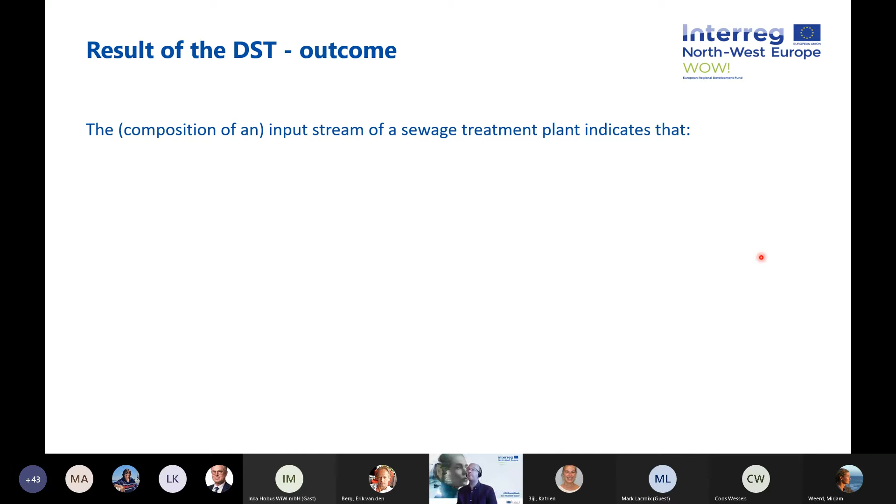So what does the DST show? When you fill in the composition of an input stream of the sewage treatment plant, there are three options. First, the implementation of the technique for cellulose, PHA, and/or lipids is promising - green. Second, implementation of either technique is not feasible based on the input parameters. And the final option is that it's not clear yet if it can be used - you need a more detailed consideration on one or more parameters to be able to make this decision.

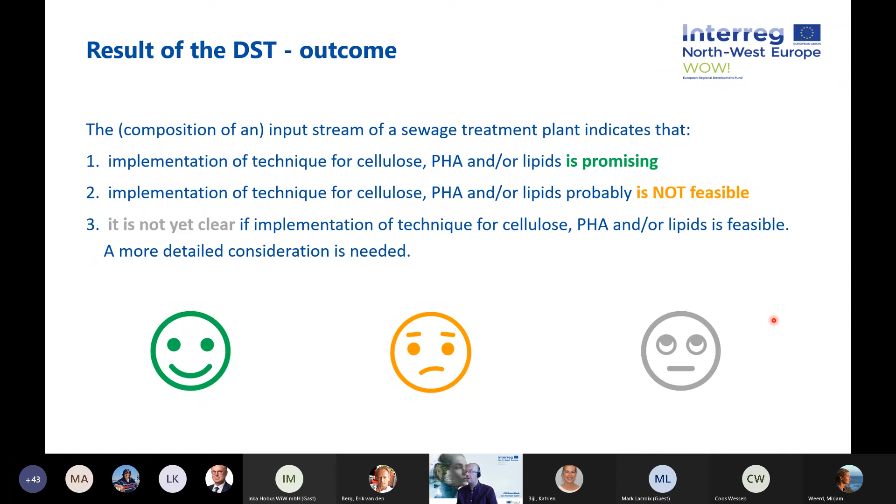When you look at the information the decision support tool gives, besides feasible, not feasible, or further look needed, we also give an indication about the effects of the WOW technologies on other sewage treatment plant processes. You can, for instance, imagine you already have biogas production, or you have a different...

I'm very sorry, but for some viewers the slides do not proceed - can you restart the slide sharing? Probably it's because I'm highlighted on the screen, or someone put me in the spotlight. I'll move myself outside of the spotlight. Can you see it now, Katrien? I can see it now. Do I continue with this current slide, or should I go back one or two? I think it's good to continue. We will share the slides afterwards anyway.

So besides the outcome of the DST - whether a technique is feasible - we also say something about the effect of the technologies on other sewage treatment plant processes. For instance, if you have biogas production installed, does one of the techniques affect this process, because that's something you would not like to occur. It gives information about technical aspects based on information from the pilot, such as how much space you need. Economic aspects are based on a techno-economic assessment we are performing within the WOW project. It also gives information on environmental and sustainability aspects, and finally some information about social aspects.

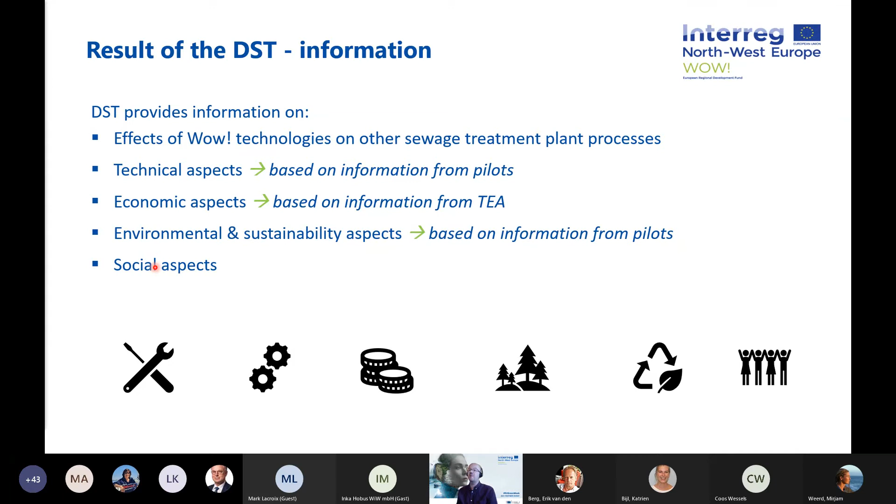So the next step is the information you need to put into the decision support tool. You can fill in up to 50 different sewage treatment plants, including the name and location, so it's easy to see later which sewage treatment plant the result belongs to. You need to fill in whether the sewage treatment plant has a primary treatment, yes or no, because that's important for PHA production. The next parameter is the percentage of sewage from households, with 3 options available to click on, and the amount of population equivalence (PE, inwoner equivalent in Dutch).

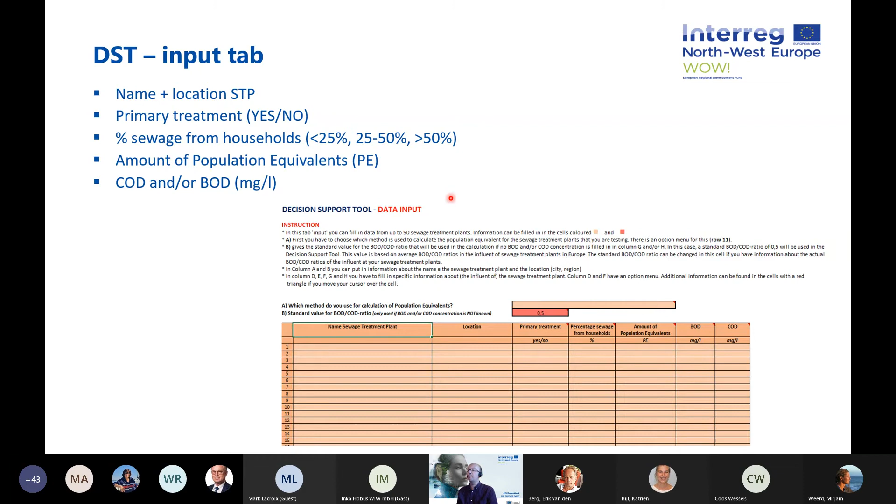Finally, you need to fill in information about the COD and/or BOD. If you don't have this information available, we use a standard value as shown here in red, which you can also change if you have that information from your sewage treatment plant. So this is basically all the information you need to fill in, and then we will go to the results.

So first of all, you have a tab with the overall results of the DST. This gives an example with some fake numbers that we used in this case. Here you see the names of the sewage treatment plants and their location.

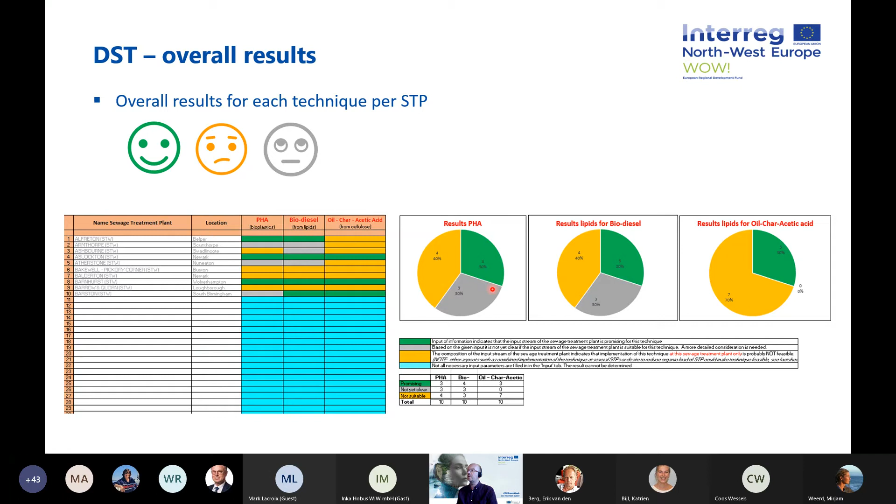Here you see, per product or per technique, whether it's feasible (green), not feasible (orange), or needs a further look (gray). The pie charts give an overview of which percentage of the sewage treatment plants give either of these results.

If you would like to take a more specific look, and this is the one for PHA, for each of the different techniques you have a separate tab where you can find, per parameter that you filled in, the outcome. If it's green, that's positive, but you can check why a certain sewage treatment plant does not give a positive outcome. And of course it also gives the overall results.

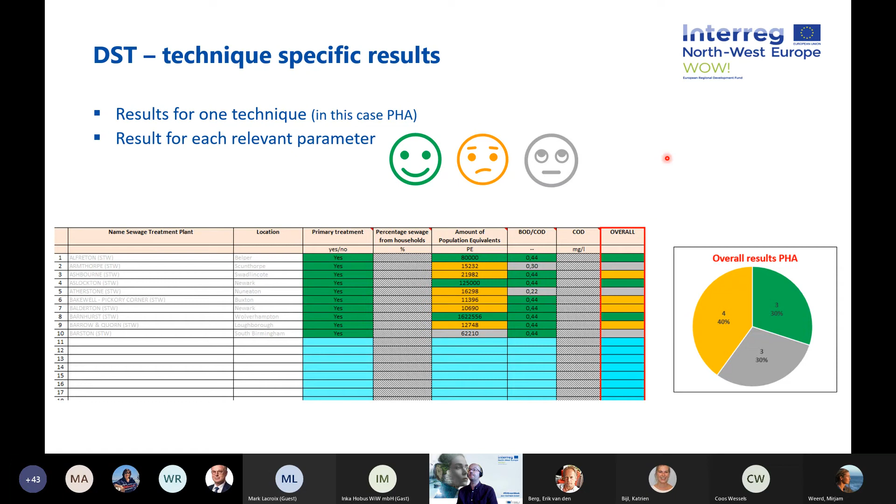As I already told you, we also have a fact sheet tab that gives different information, one for each of the different techniques. This one gives an overview of the techniques and their effects, different techniques that can already be implemented at a sewage treatment plant.

And here you have information: the pink one says there is no impact on the process, the yellow one says it possibly has an effect, and the brown one says it definitely has an effect on the process.

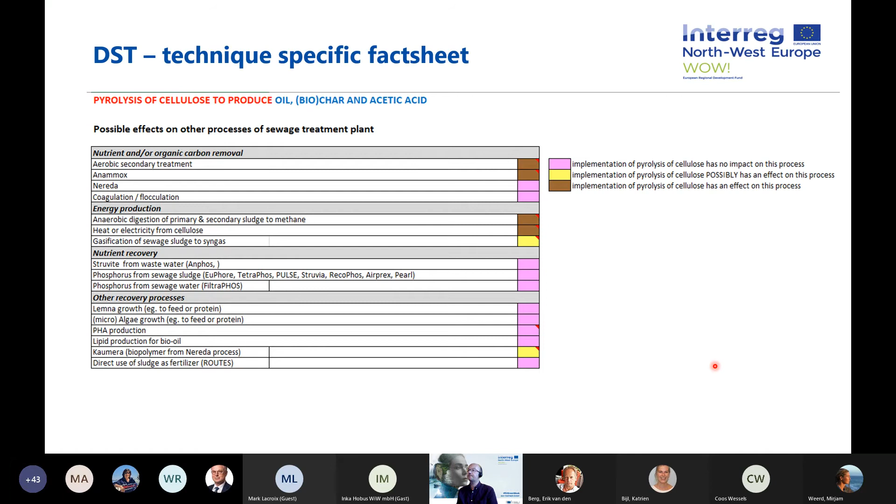In this case, it's the fact sheet for cellulose to produce char, acetic acid, and oil. As you can see, there's also a red triangle, and if you go to that red triangle in the Excel, you get more information as to why there is that effect.

Finally, the fact sheet also has information about the technical aspects, economic aspects, environmental and sustainability aspects, and social aspects, in this case of pyrolysis as an example. With technical aspects, you can say something about the dimensions, the status of the technique, or electricity use. With economic, we look at CAPEX and OPEX. With environmental, it says something about odor, noise, or visual pollution. And with social aspects, it says something about health and safety, public acceptability, and also legal aspects.

As you can see, something is still put there in red because we're still in the latest stage of developing this based on the results of the pilot. So that concludes my first overview of the DST, and the idea is that the DST will be publicly available after the summer holiday, put on our WOW website, and available for everyone to use. Thank you very much.

Thank you very much, Jappe, for your explanation about the decision support tool. Are there any questions for Jappe, or maybe some questions left for the previous presenters? Please take the floor by raising your hand or asking in the chat. I'll just wait a few seconds. No questions so far? Well, that hopefully means you were very clear about what the DST means. At least for me, you were very clear.